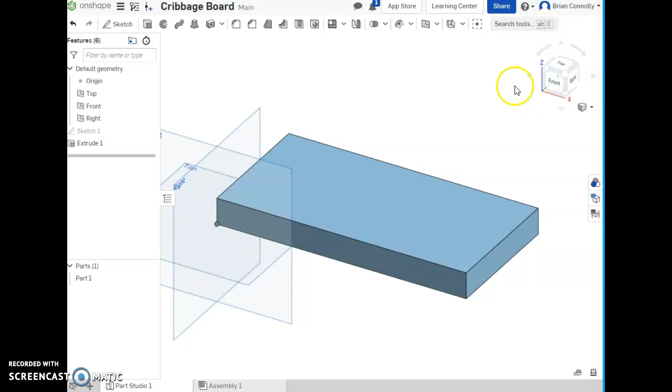Okay, in this video I'm going to show you how to use the pattern tool and the hole tool in order to get all of the holes you would need for a cribbage board. And so what I've already done is I've already made the basic shape of my cribbage board. It's going to be 5 by 10.

I picked that because 5 inches by 10 inches is about the same size as the bed I have for my CNC machine. If you are going to make this out of 2 parts, it could be longer. It would just be each part would have to be a little bit less than this 5 by 10. This kind of maxes our CNC machine out.

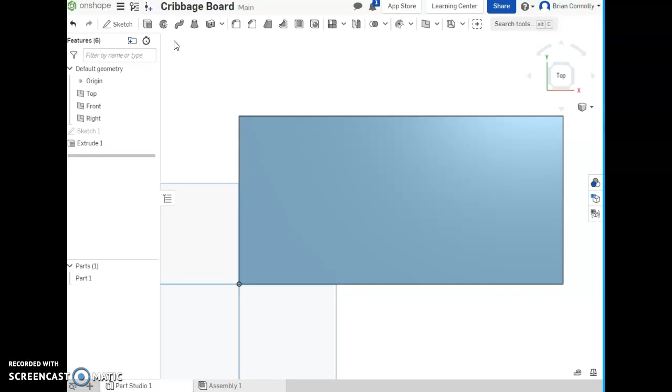Okay. And the first thing I'm going to do is I'm actually going to make a sketch on the front here, and I'm going to add a point, and that's going to be for the first hole. And I'm going to dimension that, and just for this it's a point, so I'm going to do the location. So I've got 0.75 here, 0.75 here, and that's pretty close.

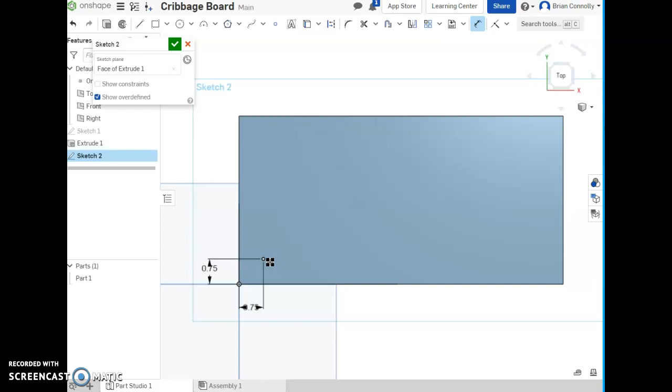And this is a total of 10 inches, and I want to kind of have a little border of about 0.75 to the center of the outer holes. And so I'm going to take 10 minus 0.75 times 2, which is 1.5, and I'm left with 8.5 inches. Okay? So I'm going to remember that number really quick, and that's going to be my width. And so I've got my sketch. Turn those off, don't need them right now.

I'm going to make a hole. Usually it's about 1/8 of an inch, and the depth is usually maybe 1/4 inch or something like that. You want it deep enough that the pegs will go in, but not so deep that they get lost in there. And usually 1/4 inch is pretty good.

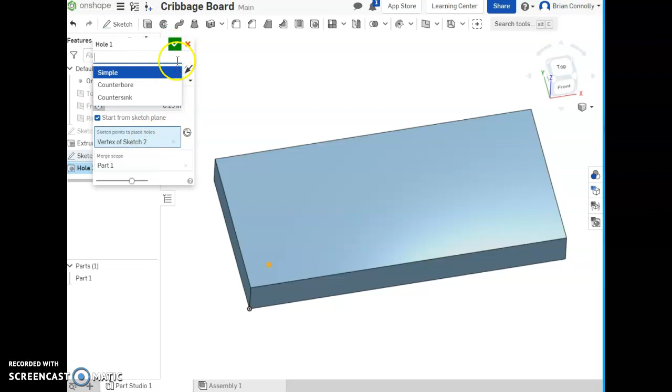And I've already selected the one. It's a simple hole, which is good. It's blind, meaning it goes and then stops. And then I've got my diameter and my depth all figured out. Good. And so there we've got our first hole.

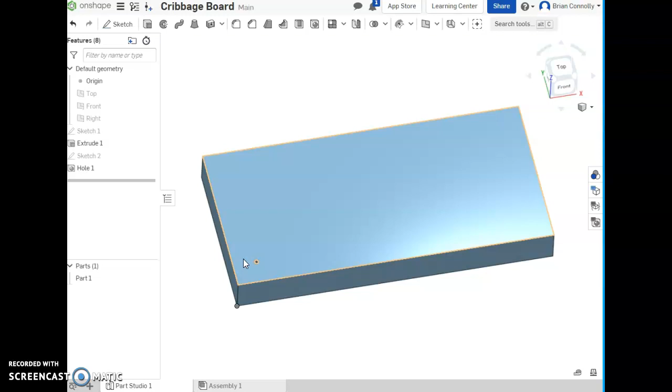Now what I'm going to do is I know that for a cribbage board I need to have 30 holes in width, and each one is grouped up into 5. And so I've got groups of 5 along there. So I've got 6 groups of 5, and in between there's usually a gap. And then on the one end will be another set of holes, and then another gap.

And so what I usually do is I make them so that it's the total number of holes. Anywhere there's a gap, I also include a hole for my pattern. And then what I do is I kind of cover those up, and I exclude those somehow.

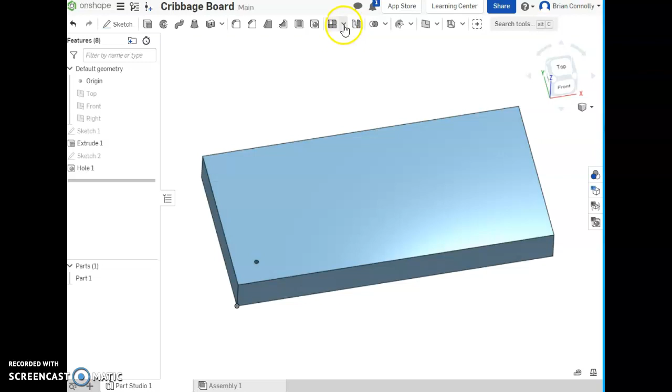So I'm counting, and I'm seeing that I have the 30 holes, plus the one more for kind of the start and the end. And then I have 1, 2, 3, 4, 5, 6 different gaps. And so if I'm adding that all up, I've got 31 plus 6, 37. So I kind of need 37 equally spaced things, and then I'm just going to exclude those 6 that aren't included. And so for this, I'm going to use a linear pattern.

And notice I kind of find it easier to use a linear pattern when we're talking about features. So I'm going to do feature pattern as opposed to a sketch. And the thing I want to pattern is going to be this hole. So that's that first thing.

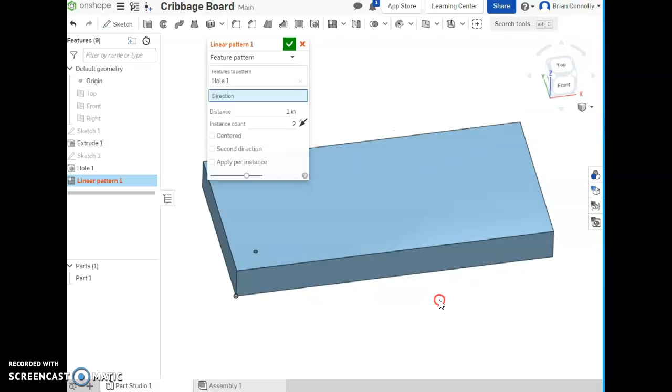The direction, you are going to pick a line that is parallel and goes in the same direction as the holes. So I selected this edge because it's parallel to the way I want my holes to go. The instances, so that's going to be, what is that, 37 of those.

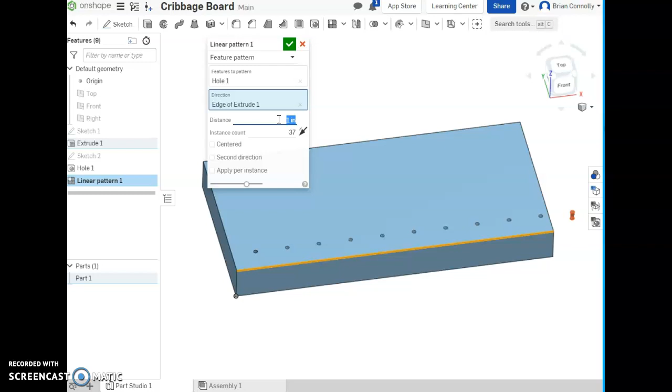And the distance, I don't know what that distance is, but I'm going to try this out. I know that I'm going to have 8.5 inches, but I'm going to divide that into 37 equal spaces, and I'm going to see if that gets me there.

Actually, I'm being reminded that I have to think about the number of gaps, and so I'm actually going to see if it's one less, and so I'm going to have one more instance than I have on the denominator here, and I believe that works right there.

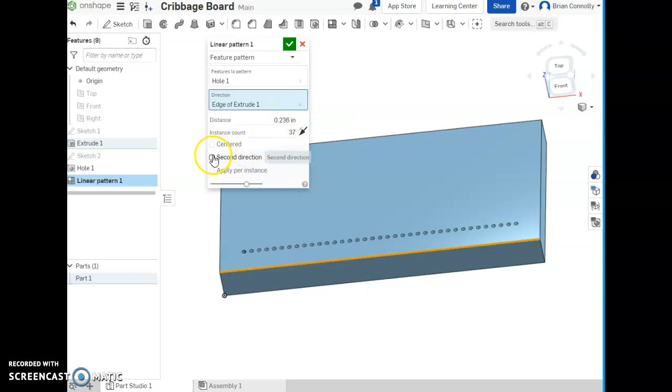It seems like kind of a mess, but that's going to be okay. Then what I'm going to do is I'm actually going to go in a second direction. Usually you have two rows, so an up and then a back. And so I'm going to select a second direction going along this line right here. Instances, this time it's only 2 in that direction.

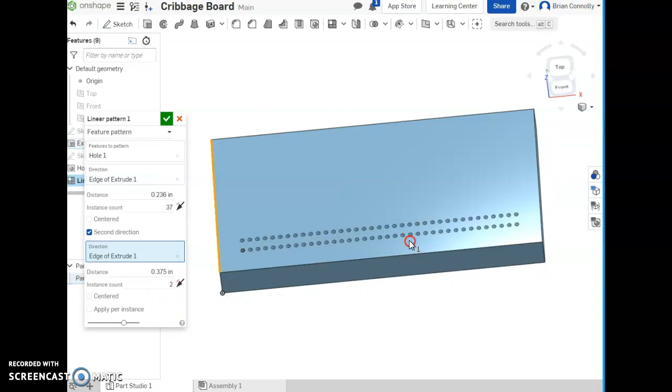And what I could do is kind of say the same thing. I could say 0.236 and see what that looks like. That's too close, I think. I like them a little further away. So I might say 0.375, that's 3/8 of an inch. And that seems like a pretty good distance. They're not right next to each other, but they're still fairly close. We know they're from the same track, so to speak.

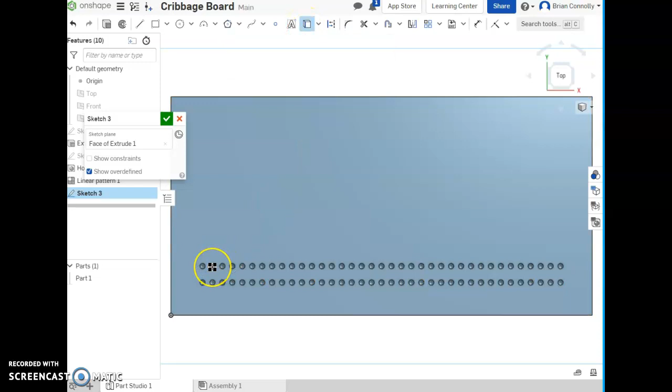Then what I'm going to do is I'm actually going to make a new sketch right here. And we've got this tool called use/project. And what I'm going to do is I'm going to project the circles, the holes, for all of the ones I want to exclude. So I've got 1, 2, 1, 2, 3, 4, 5. These two, going to exclude those. 1, 2, 3, 4, 5. Exclude those.

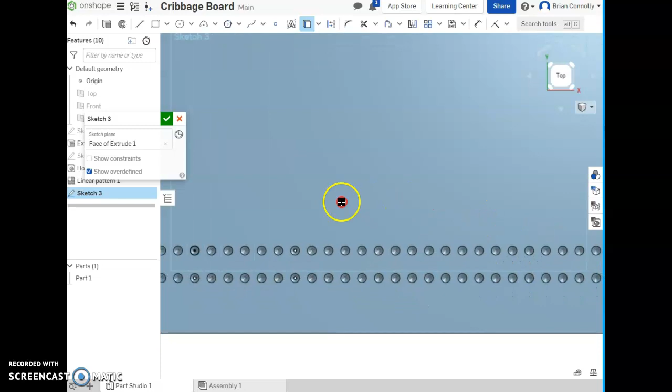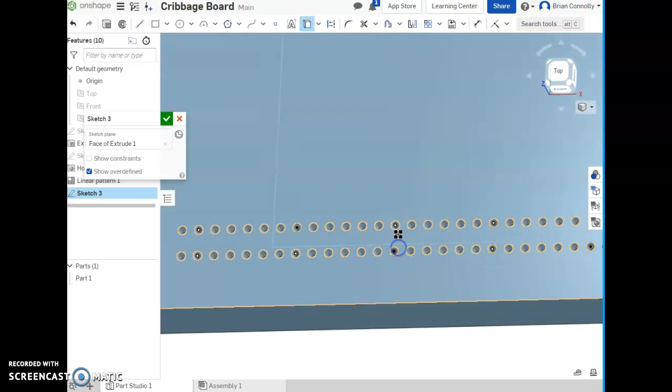Then 1, 2, 3, 4, 5. Exclude these circles. 1, 2, 3, 4, 5. Exclude these circles. 1, 2, 3, 4, 5. Exclude these circles, and then 5 left. All right. Double check that I have the lines, the outlines, and must have skipped those. I got just the centers, so I'm going to make sure I have those outer circles all selected. Okay. And then I'm going to hit OK on my sketch.

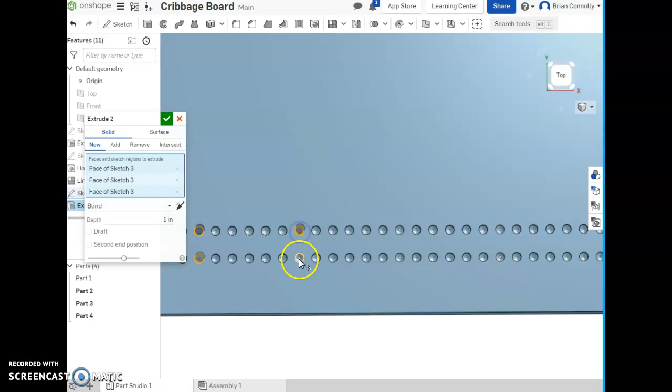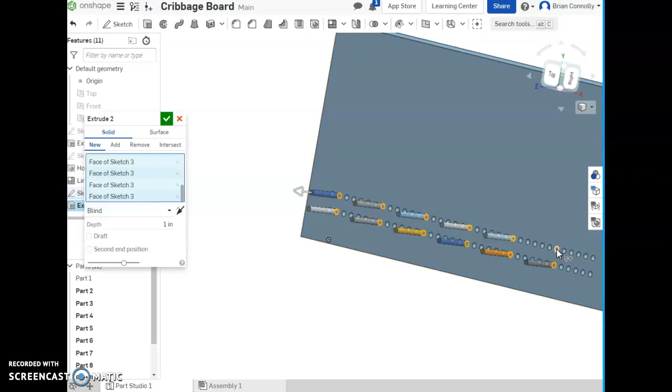And I'm hoping that I can extrude these shapes right here. So this one, and this one. I'm going to go here and here, and then here. Oh, I accidentally selected it, so I can click on it again. And again. And notice that I'm allowing this to look wrong. Like this isn't the way, but it helps me to kind of see what I'm doing.

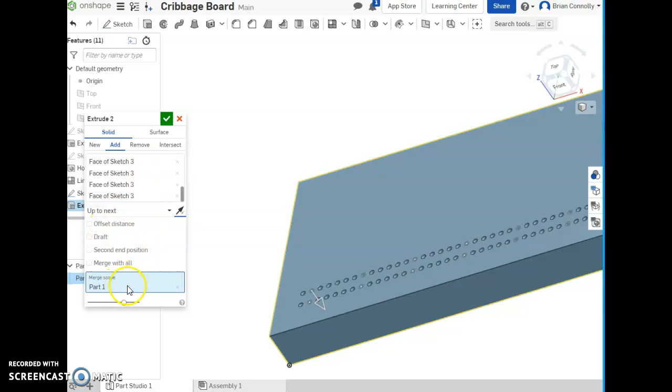What I'm actually going to do is I'm going to add material. It's not going to be blind. It's going to be through all, or actually to next. And then I'm going to flip the direction. And what that's going to do is it's going to add material until it hits the bottom of the hole, and that should be good. And it merges with my part 1. That's good. And so I'm going to hit OK, and I'm going to notice that those holes got all taken out.

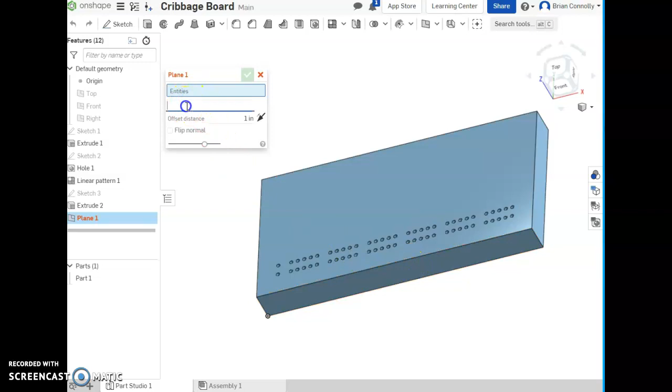The next step for my cribbage board is to mirror, but in order to mirror, we actually need to have a mirror plane. We need to have a mirror to show it. And so what I'm going to do is I'm actually going to use a mid-plane, and I know it's kind of in the middle of this, and looking on the other side, this one. And so what I should see is a plane going through the middle of this part. That's all good. So again, that's a mid-plane, and selecting both sides of this, the long sides.

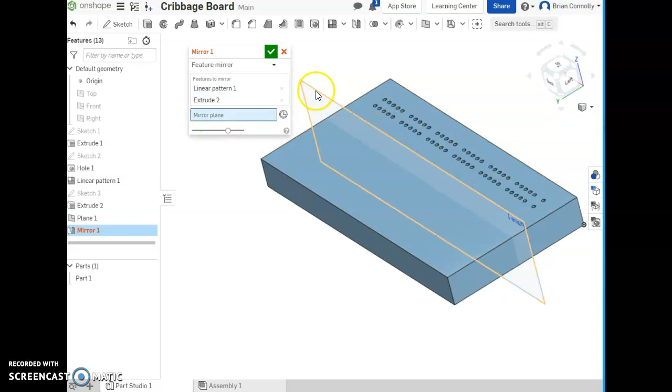And then from there I can mirror, and for me I like to again feature mirror, and I'm just going to select here. I'm going to select this linear pattern, but also this extrude. And then it asks for this mirror plane, and so I'll select that, click right there, and you can see I've got the same thing. Ooh, it forgot that first hole, and so what I'm going to do is go back up to features to mirror and select that hole, and you can see I've got all this all done, all good.

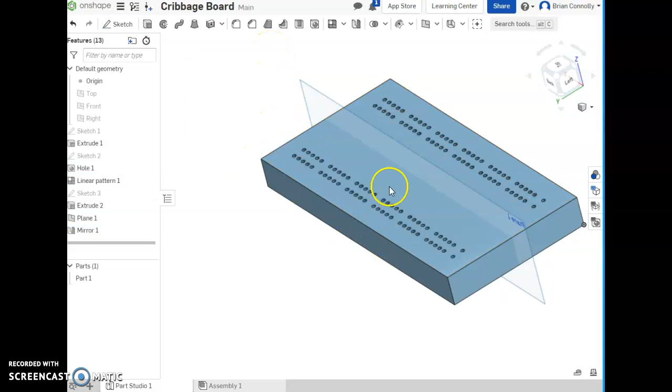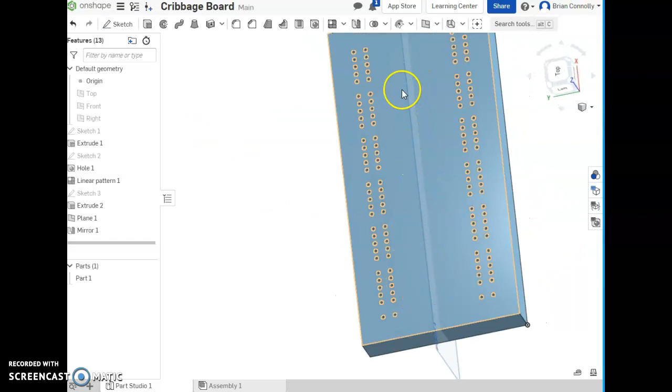Okay, so now I've got 2 tracks. This is a 2-person cribbage board, and what you can actually do as well, if you want, you could make this actually a linear pattern and do a pattern of a pattern and have 3 of them wide this way. But I like to mirror it, and then I like to kind of laser or put some sort of paint, maybe a decoration kind of down the middle as well. So that's a really quick, really fast way of doing a cribbage board.